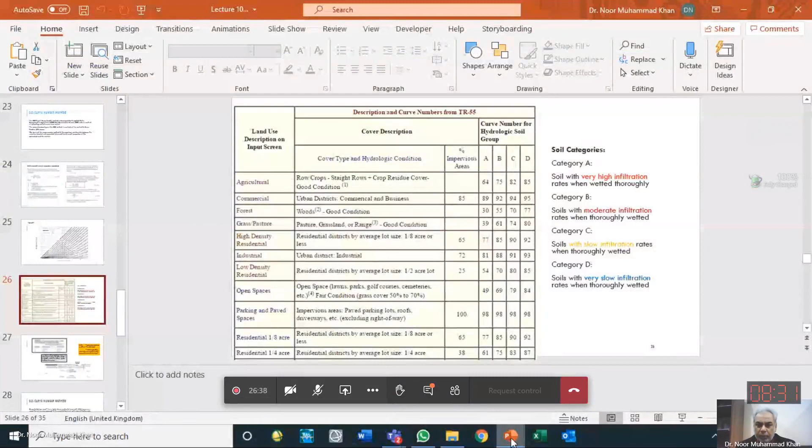SCS, Soil Conservation Service Department, a sub part of the US Department of Agriculture, has given curve numbers as a coefficient or constant for different kinds of soil, land uses, and soil types. For example, for agriculture land use having row crops, the curve number varies from 64 to 85 for different soil groups A, B, C, D. So four kinds of soil groups are specified, and they divided the soil based upon their infiltration capacity.

Category A has very high infiltration rate, B has moderate infiltration rate, C has slow infiltration rate, and D has very slow infiltration. So they divided into four characteristics. If the soil has very high infiltration rate, the curve number proposed is 64.

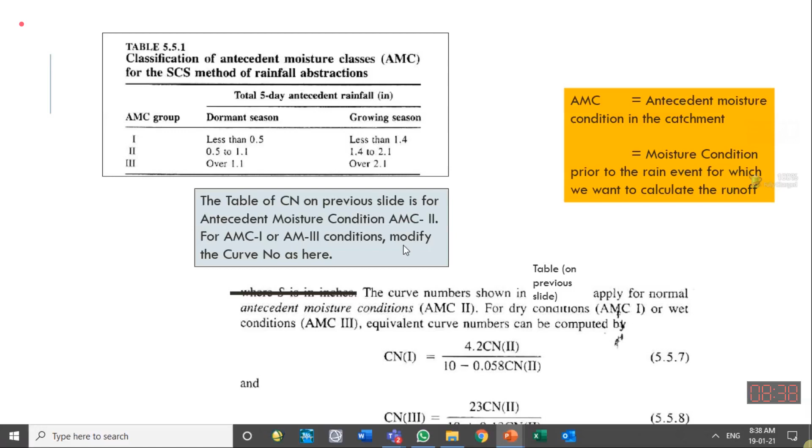So that should be taken into account. If curve number is known to us, this SCS method has given us the relationship between runoff, precipitation, and infiltration rate.

IA is initial abstraction, initial losses. Abstraction means taking out something. We use this word quite often in hydrology. We call groundwater abstraction is so much in Pakistan, meaning groundwater extraction is so much. Abstraction and extraction are similar things. So here, abstraction means water that is taken out of the precipitation, and the rest is the runoff. So it means initial losses which are there.

So S is the potential maximum retention in the catchment. The total retention which is possible in the catchment to fill all the depressions and take out the infiltration also, that is called S. P is the precipitation for which we want to find the runoff.

So they have related runoff, in units of depth of water (inches), equal to P minus IA, initial abstraction, squared, divided by P minus IA plus S. This initial abstraction, from different experiments, can be taken as 20% of the total or maximum retention. So IA can be replaced as 0.2S, and the same equation 2-1 can be rewritten only in terms of P and S: Q is equal to P minus 0.2S, squared, divided by P plus 0.8S.

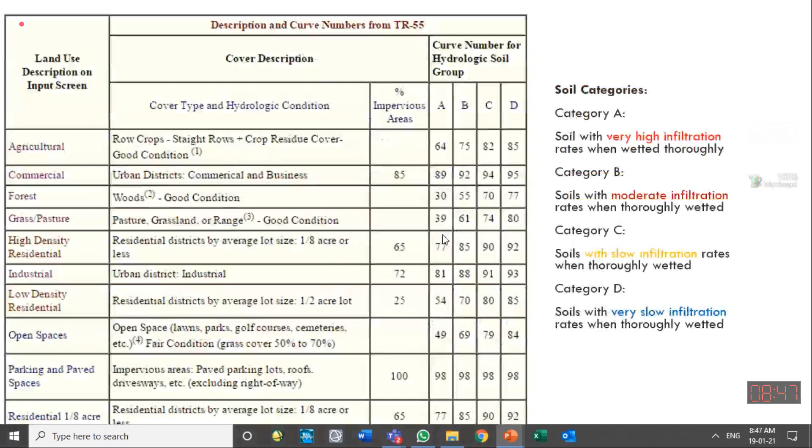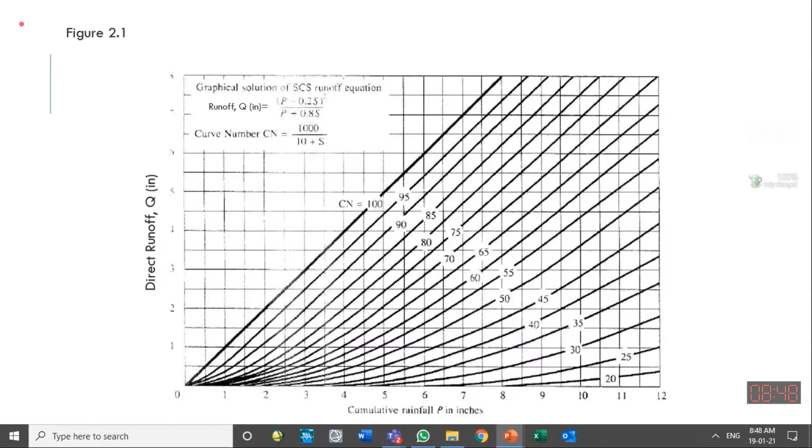So you can see that out of the 7 inches, 5.7 or 5.8 inches reaches the outlet, but the rest is retention in the catchment. If somebody wants to know the losses, they can find it from this method. If somebody wants to know the runoff, they can estimate it from this method. Hopefully you will be able to use it well.

So either you use a graph or you use the equation. You should know both of them. Sometimes we give the graphs to you. Equations are simple: Q equals P minus 0.2S, squared, over P plus 0.8S.

We know the original equation relates initial abstraction and total retention with runoff. Initial abstraction was taken as 20% of the storage of maximum retention. And curve number and maximum retention are related by 1000 over curve number, minus 10.

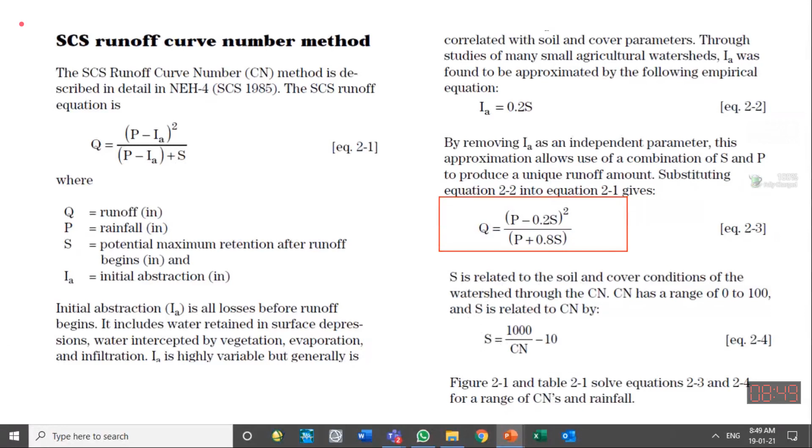So these equations are for inch units, keep that in mind. In other literature and books that use SI units in centimeters, you will find slightly different coefficients. So this method is available in different places using centimeters and in other places using inches. Take care that these equations are valid for inches.

Any questions on this method? This is widely used. People have used it in GIS as well.

They give the land type. They have the file for the land type, land cover, soil type. Using these three pieces of information, they find the curve number automatically from the computer because the table is also fed to the computer. So if the curve number is known, then the rest is calculation: calculate S, calculate runoff for different kinds of rainfall.

So methods are available which can use this SCS method. Hydrological Engineering Center, HEC-HMS software has computerized this SCS curve number method to convert rainfall into runoff.

Another method is unit hydrograph. We should know the definition of unit hydrograph and we should also know how to use it to measure the direct runoff. Unit hydrograph is a direct runoff hydrograph. A hydrograph is a relationship between some flow parameter with time. So if the flow parameter is only the direct runoff, then we say this is a direct runoff hydrograph.

So unit hydrograph is a kind of DRO hydrograph, direct runoff hydrograph. It is not a total hydrograph, not a total runoff hydrograph. So unit hydrograph is a DRO hydrograph, direct runoff hydrograph, which is resulted due to unit effective precipitation.

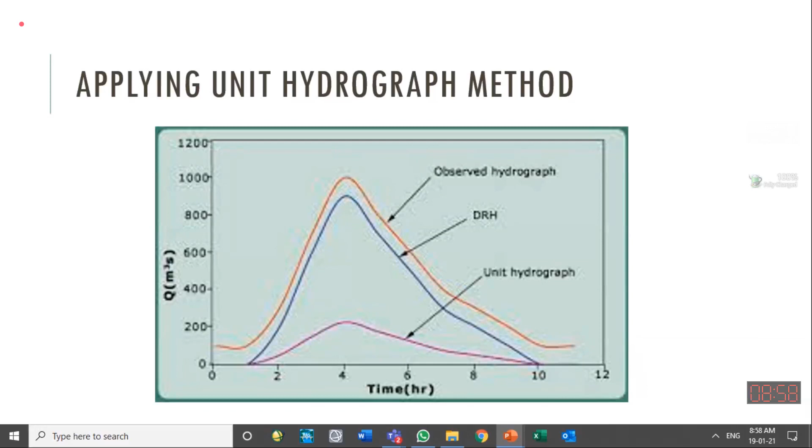If this unit hydrograph is for a storm of, let us say, 1 hour duration, keep in mind that the rainfall event can be of a different time period, and the runoff can be generated for a longer time period. Usually it happens that 1 inch of rain generates runoff for 6 hours. A 1 inch rain which occurred for 1 hour may generate runoff for 6 hours, 12 hours, or a different time. So we call this the base period, the time period in which the runoff is occurring. So base period of the hydrograph is a different thing, and storm duration is a different thing. This is the message: storm duration can be different from the base period of the runoff hydrograph.

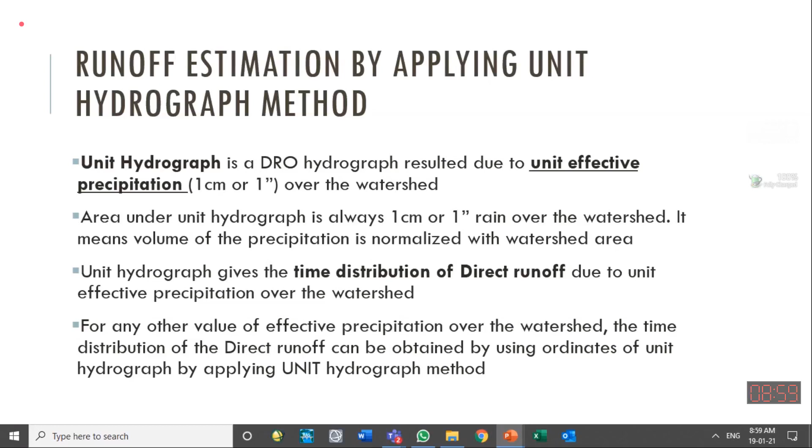So if we have the unit hydrograph available for a certain catchment, which is actually the representation of the behavior of that catchment, we can convert that into the direct runoff hydrograph. For effective precipitation of 1 inch, the direct runoff is the unit hydrograph. For any other value of effective precipitation, the time distribution of the direct runoff can be obtained by using ordinates of the unit hydrograph, multiplying them with the effective rainfall for which we want to find the direct runoff. Here is the definition of effective precipitation or excess precipitation: total precipitation minus the losses — evaporation, infiltration, transpiration.

Time of concentration — how to estimate the direct runoff for an effective precipitation of X inches. The discharge because of X inches of effective precipitation equals X inches effective precipitation multiplied by the ordinate of the unit hydrograph. That's the simple thing. I will talk about time of concentration in the next lecture — simply it is the time required by a drop of water to reach the outlet from the farthest location of the watershed. For example, we have a watershed and we have an outlet, so the time taken by a drop of rainfall or water at the farthest point in that catchment to reach the outlet is called the time of concentration.

When the storm duration is equal to the time of concentration, then we get the maximum flood possible in that area. So storm duration is selected by the hydrologist for carrying out the hydrological studies. He should select the storm duration based upon the time of concentration of that catchment. So carefully consider these things.

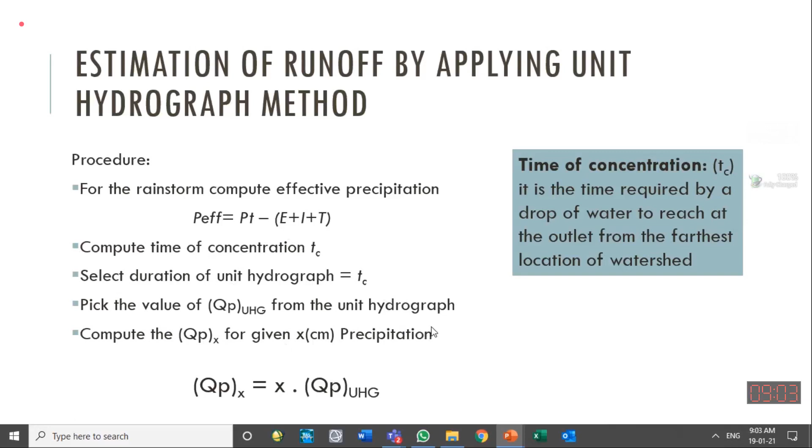So that is one method. In this we assume that the rainfall is uniform over the whole catchment. So this method is applicable for the rainfall event which is covering the whole catchment. We are not using it otherwise. The intensity of the rainfall is assumed to be uniformly distributed over the whole catchment. If it is not, divide the catchment into smaller parts, then derive the unit hydrograph for that part, and use that one.

It is good for catchments less than 500 kilometers square. So caution should be used, because for larger catchments the unit hydrograph has a different shape. We usually don't cover the whole large catchment with one rainfall event. For a larger catchment like the Indus Basin catchment, with the outlet at the ocean, it is not normally possible that the whole Indus Basin is covered with the rainfall event.

So this is good for smaller catchments, and it is applicable for tropical watersheds, those areas which are located in the tropical regions. So that is unit hydrograph.

So we have studied empirical methods: Inglis, Khosla, and Lacey method. We have studied a little bit more conceptual or physical-based methods, where some parameters are dependent upon the type or physical characteristics of the catchment. So we are moving towards more physical methods, that is the SCS curve number method.

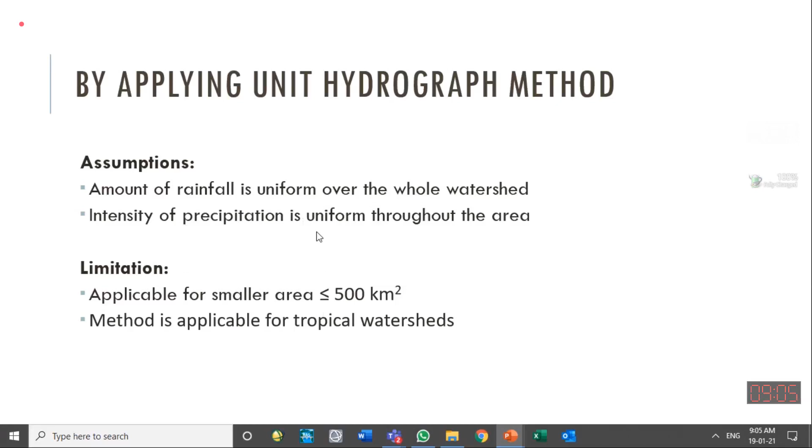Another method is the rational method, which also takes into account the characteristics of the catchment in the form of the runoff coefficient C. There is a simple equation which helps us find the peak discharge and the total runoff, both using this formula, depending upon the coefficient and rainfall we have selected. If we select the maximum possible rain in that place, this formula will give the peak discharge. If we select the average rainfall, we will get the normal or average discharge in that region. So CIA: three parameters. C is the coefficient which takes care of the catchment characteristics, I is the rainfall for which we want to find the runoff.

A is the area of the watershed. So C and I we use to calculate the peak discharge or the direct runoff from a catchment. These values vary, and the coefficients I and A have particular units. In some books they say I should be in inches, area should be in hectares or acres, so we have to take care of the literature we are using to select the C value. The literature will tell what should be the unit of I and what should be the unit of A. This is an empirical equation, and they have found that a certain kind of catchment should have a C value of so much, then runoff can be calculated.

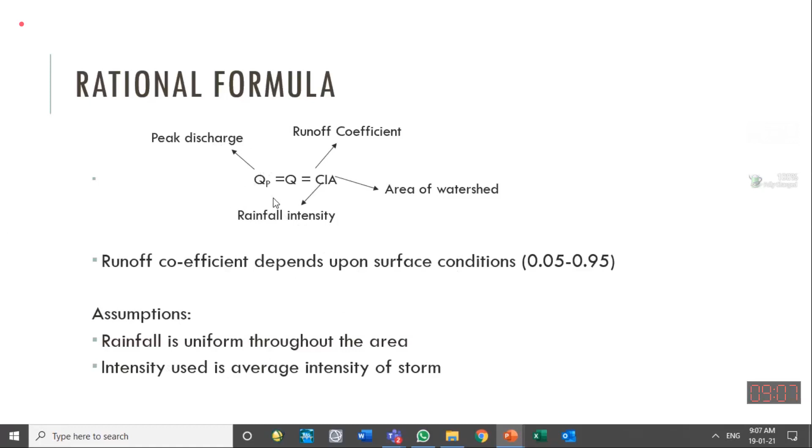Rainfall is assumed uniform throughout the area. The intensity used is the average intensity of the storm, so we get the average flow in that area. If intensity is used as the maximum precipitation, we will get the flood value, the peak flood value. So these are some of the methods of runoff estimation.

We're seeing what a hydrograph is, how we can separate the hydrograph, and how we can make the unit hydrograph. These things have been covered in the lab also, so we will go through them quickly.

Last time I taught you that groundwater does change. Here is the actual observed groundwater variation in UET. In December of 2019, the water level was 244.5 meters underground, with respect to mean sea level. It reduced to as low as 243 meters, and then in the middle of 2020, in July, it increased to 245 meters. So that is the variation of groundwater we are observing in this place, because of water abstraction and because of recharge from rainfall.

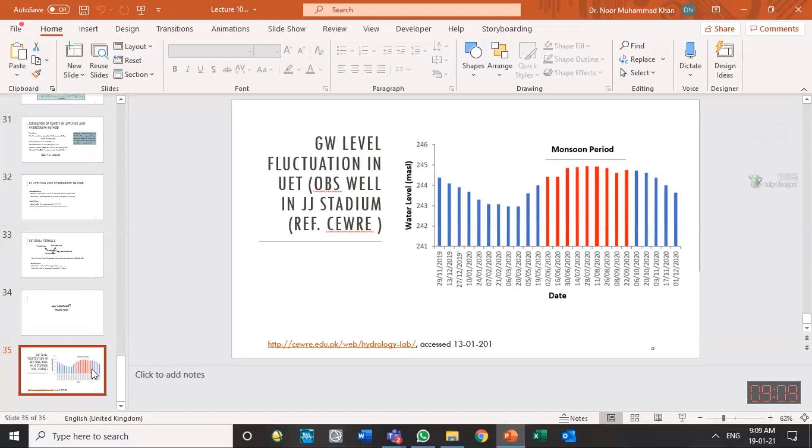So I stop it over here. If you have any question, you are welcome.

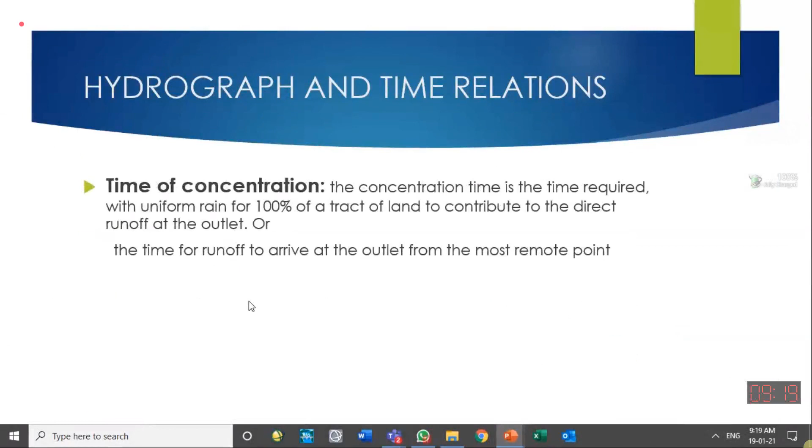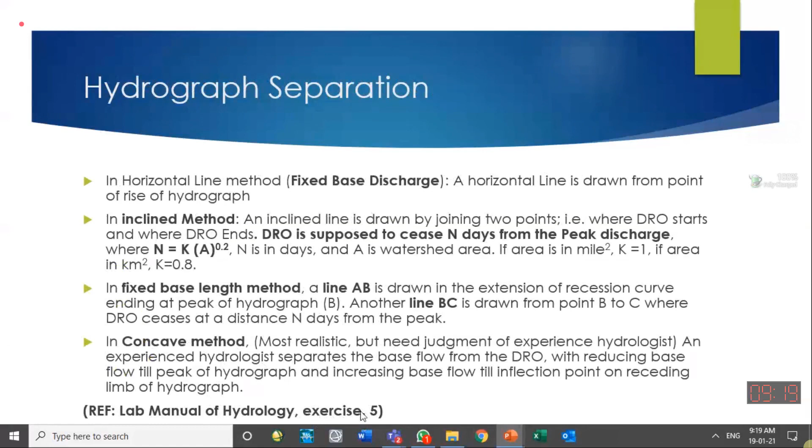We will talk about these factors, and then the next part covers the definitions, which are also given in the lab manual. Then separation of the hydrograph using the straight line method, the base length method, and the concave method, which you have covered in exercise 5 also, as you have gone through it in the lab.

Then how to make a unit hydrograph. So the definition of the unit hydrograph is placed over here again with reference to USGS. So definition, and how to make and how to use it - both things we should know.

We should be able, as a hydrologist, to make a unit hydrograph. For making a unit hydrograph, what do you need? You need the actual hydrograph of that catchment. It means you should have a stream gauging station for that catchment, which will give you the flow quantity at different time intervals after the rainfall.

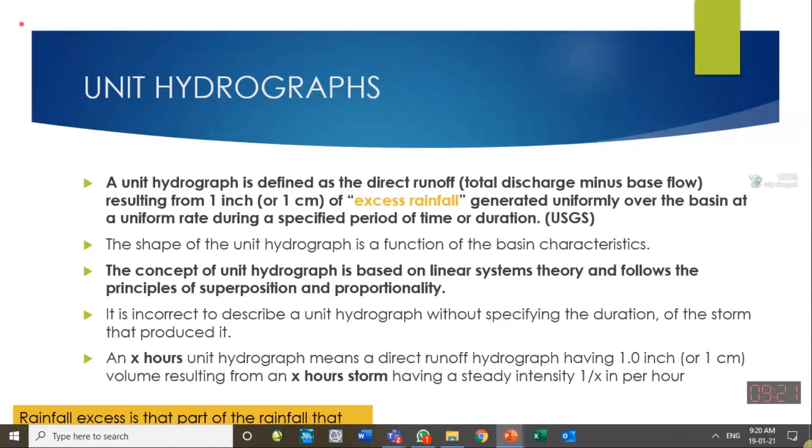Using those observed flows, we can make a total hydrograph. From the total hydrograph, we can subtract the base flow, and the remaining will be the direct runoff. Out of that direct runoff, if that is for an effective rain of more than 1 inch, we will adjust the ordinate of the direct runoff so that the area under the graph equals 1 inch of effective rainfall. So adjustment is the third step.

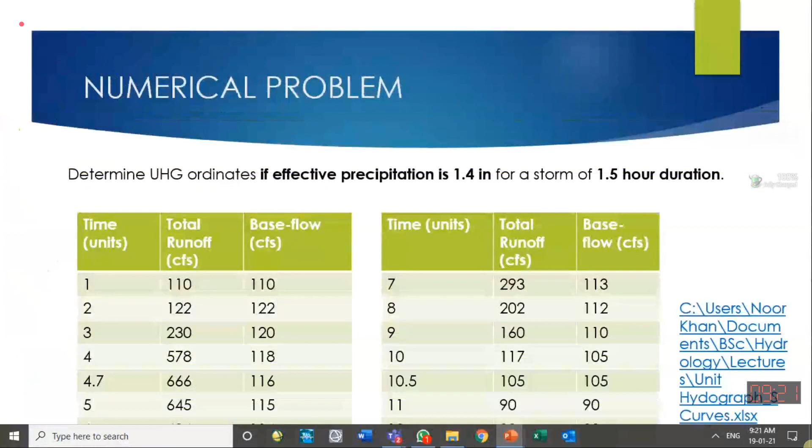So that's how to make a unit hydrograph, and how to convert a unit hydrograph into a unit hydrograph of a different duration - we call that conversion of unit hydrographs.

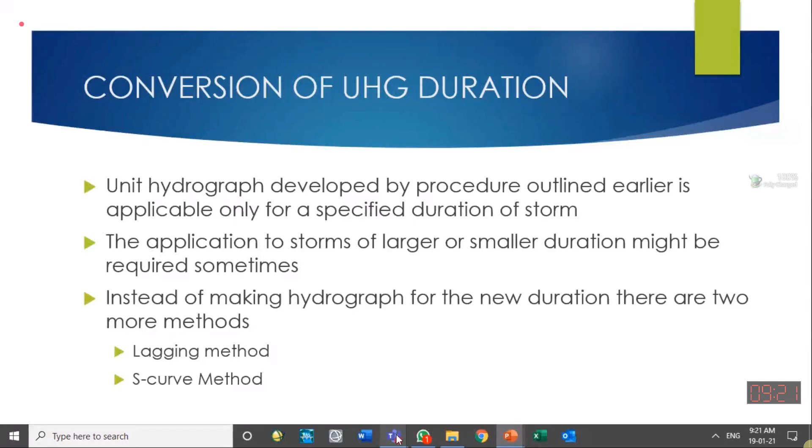So that's today's lecture we are assumed to carry out today. So let us move towards what is a hydrograph. I think you should tell me what is a hydrograph.

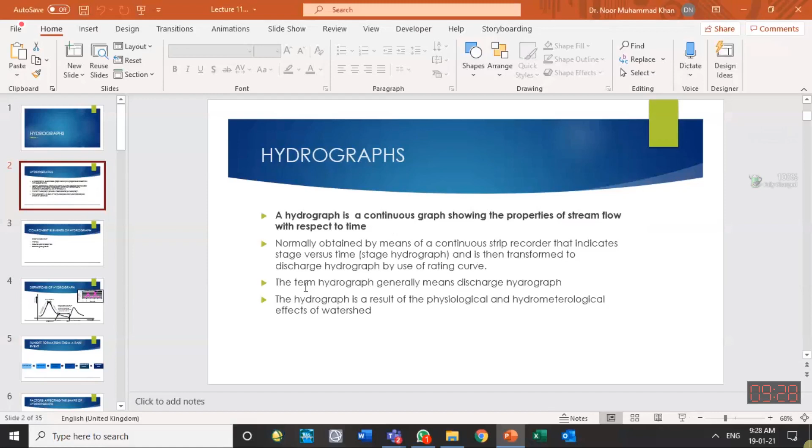And if we have a stage hydrograph and if we have a rating curve - who will tell me what a rating curve is? What is a rating curve?

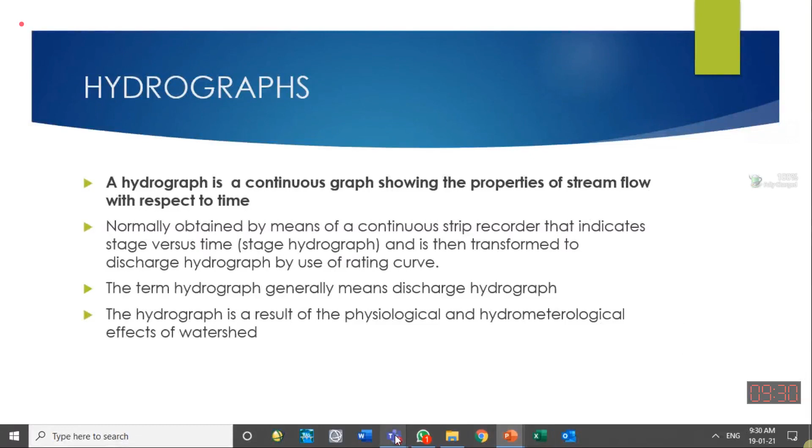Soil type, slope, what else? Cover on the land, roughness, infiltration - all these affect it. These are the physical parameters which affect the flow.

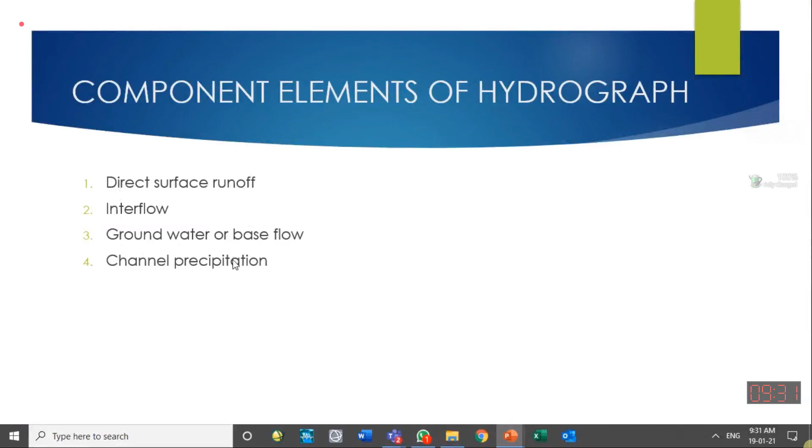So the runoff, the hydrograph, contains within it direct surface runoff - we have talked about it - interflow, groundwater, and the precipitation on the channel. So all these make the total hydrograph.

But for ephemeral and intermittent streams, it can go as low as zero flow. And for streams near the coastal area, it can go to the negative side also. Understand? Normally in a stream in Punjab, in Khyber Pakhtunkhwa, you cannot expect a negative flow - meaning flow going upward, upstream side. Is it possible? It is possible near the coastal area, depending upon the sea level waves - sometimes we have a backflow also.

So that is possible, but not in a normal watershed, only in the coastal area. Those cities which are located - for Karachi people, if they are studying some creek, Korangi Creek or Lyari Creek - they can expect water in both phases. So their hydrograph may go above or below the zero discharge. Positive will show discharge in the downstream direction, negative will show discharge in the upward direction.

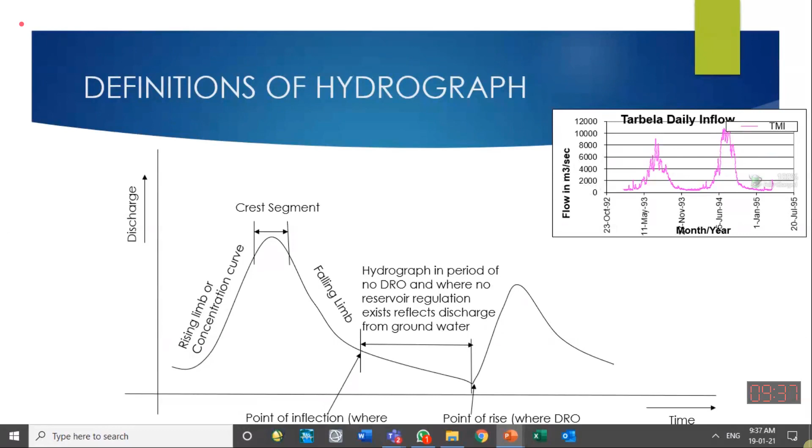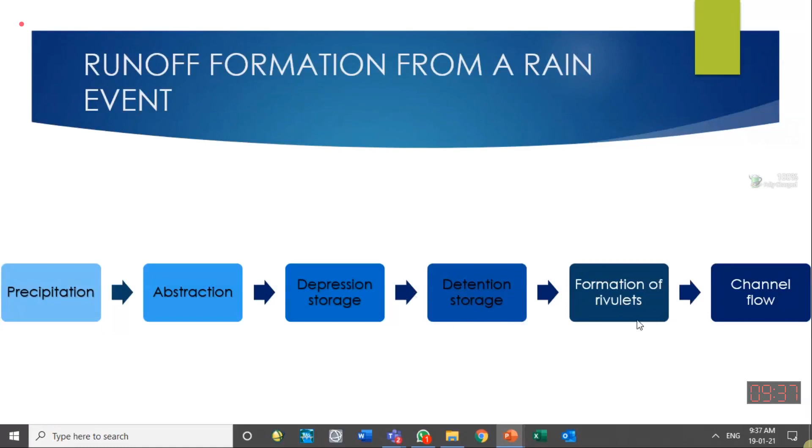If I want to convert that inches into cubic meter per second, I can do it as I told you earlier. So this is the process which generates channel flow: precipitation, then some abstraction or losses, and those abstractions are depression storage, detention storage, and then excess water starts flowing over the land, and then water reaches the channel flow. We have covered that in the previous lecture also.

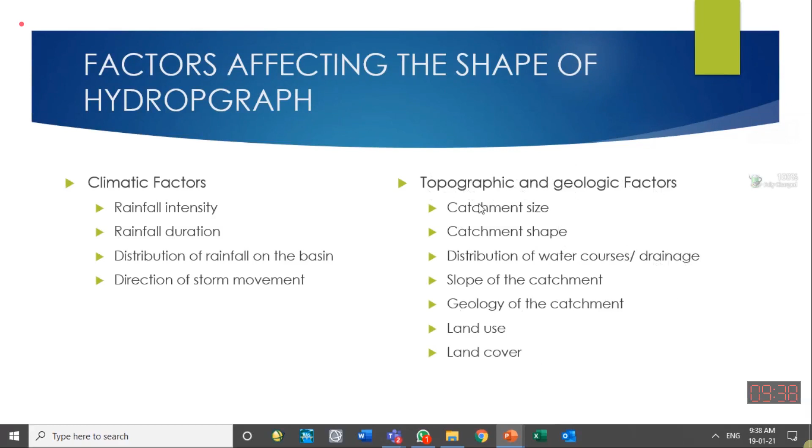Factors which affect the hydrograph shape can be categorized into two types. One is the climatic factors related to rainfall type and the rainfall event. The other is the physiographic or physical characteristics of the catchment, which we call topography and geological factors. You can call them the physical factors of the catchment. So one by one, we can discuss them in these slides.

If we first focus on the climate and precipitation factor, the type of storm does affect the hydrograph—whether the storm persists for a longer time or it is a short duration storm with huge rainfall in it. Thunderstorms are usually called short duration intense storms, containing intense rainfall activity but for a shorter duration. So for a smaller basin or smaller watershed, the highest flow will be generated because of a thunderstorm. Thunderstorms usually produce peak flow in smaller basins.

For a larger basin, since a thunderstorm is a small duration activity, for a larger basin like the Indus Basin, Mangla Basin, or Tarbela Basin, we usually need a longer duration rainfall, which occurs with cyclonic storms. We have told you about a cold front and a warm front while studying the rainfall or precipitation chapter—these are the air parcels. If it is because of cyclonic phenomena, then we usually have persistent and longer rainfall activities, and they produce flood activities. Peak discharges are produced in larger basins because of these kinds of rainfall activities.

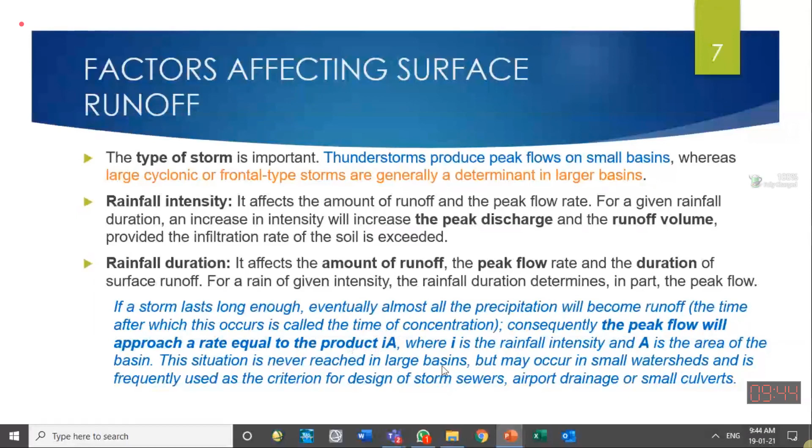So that is a theoretical possibility for a larger basin, but for a smaller basin it can be achieved. That is what is mentioned here. So that is how the effect of rainfall duration is there on the hydrograph.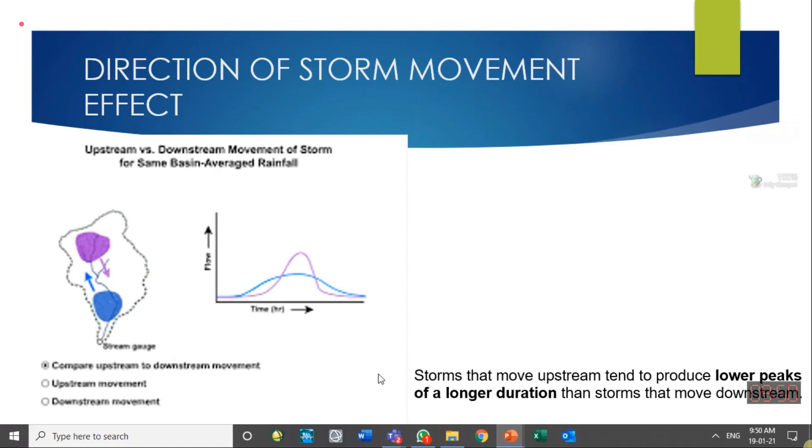Next is the effect of the drainage area, the shape of the area, and how well developed the streams and channels are. If it is a smaller area, the overall volume generated for the same rainfall will be less. But for a smaller area, it is possible that more intense rainfall occurs on it.

This is because the peak flow per unit area reduces with catchment size for a given rainfall depth. Drainage area also has an effect on the time base of the hydrograph, which is lengthened. The higher the drainage area, the bigger the basin, the more the time base of the hydrograph will increase.

Why does the peak flow per unit area reduce with catchment size? Carefully note these words: peak flow per unit area, not simply peak flow - he is dividing the peak flow by the area. So peak flow per unit area increases if the catchment is small and reduces if the catchment size is large. That is the message: as catchment area increases, peak flow per unit area reduces.

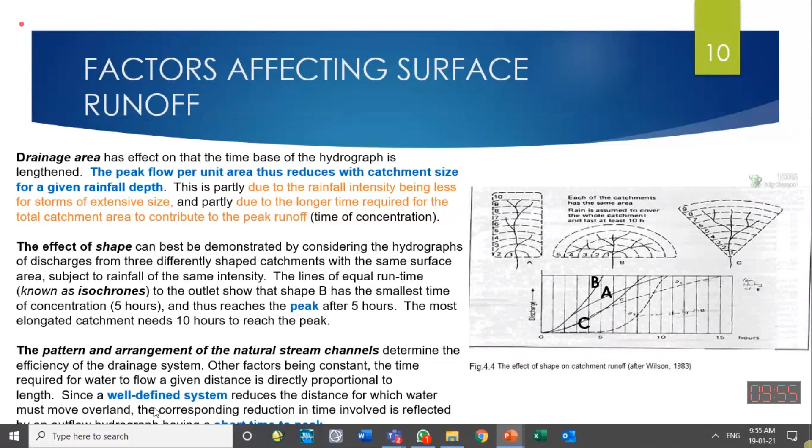Steeper slope reduces the time of concentration, so a quicker peak is generated. Also, steeper slope doesn't let infiltration occur because water cannot stand there, so infiltration will be less, more volume will be generated, and we get a larger volume under the hydrograph. Similarly, the geology or pedology of the catchment controls the infiltration rate, whether it is sandy, rocky, or silty, which controls infiltration rate, volume of water, and runoff.

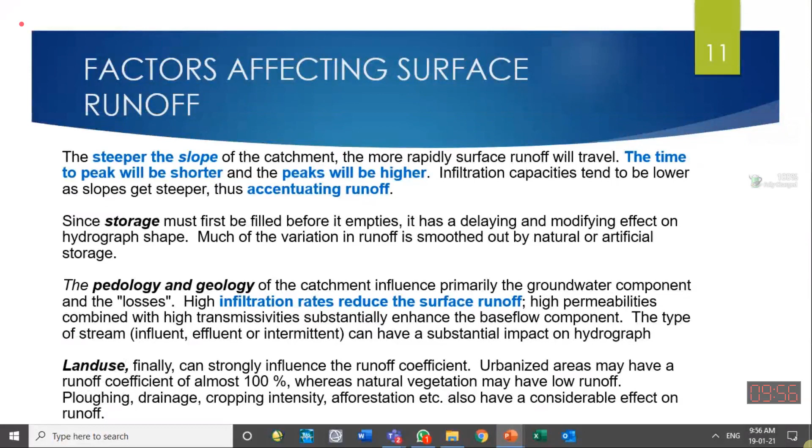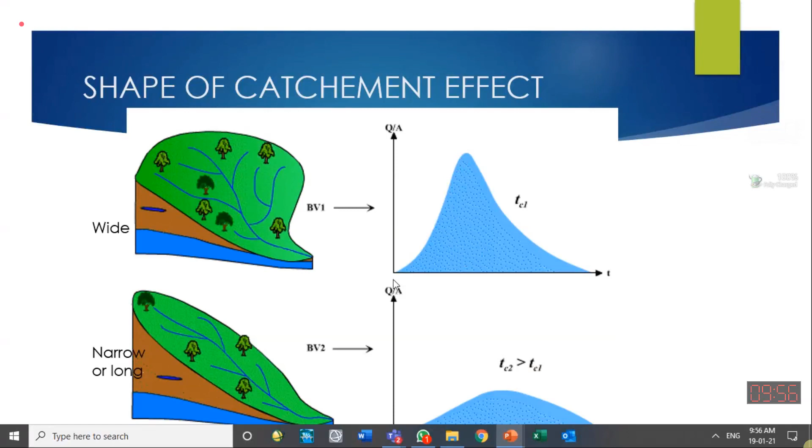So land use also changes this: whether it is agriculture or urban area controls the runoff also. Here the shape effect is shown. A narrow catchment will get the peak later, and the peak will be smaller compared to a wider catchment, which has small time of concentration, higher peaks, and earlier peaks. Shape of the catchment is shown over here.

If the shape is wider close to the outlet, we will have higher peaks. If the shape is narrow, this is the normal catchment, and we will get peaks later as compared to this one.

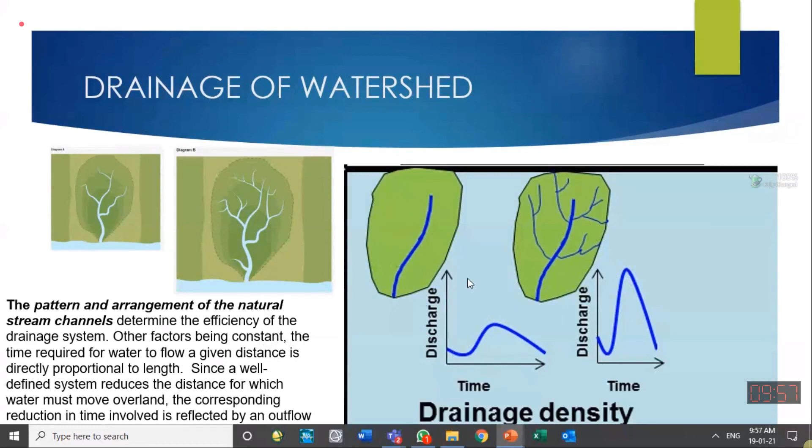So land cover effect: if it is a forest, it will stop the water and generate less flow, runoff will be less. If it was barren, without any forestry, open, there would be less infiltration and less depression storage, so more flow will be generated. This is one cause of flooding in urban catchments where vegetation is being removed, leading to more floods.

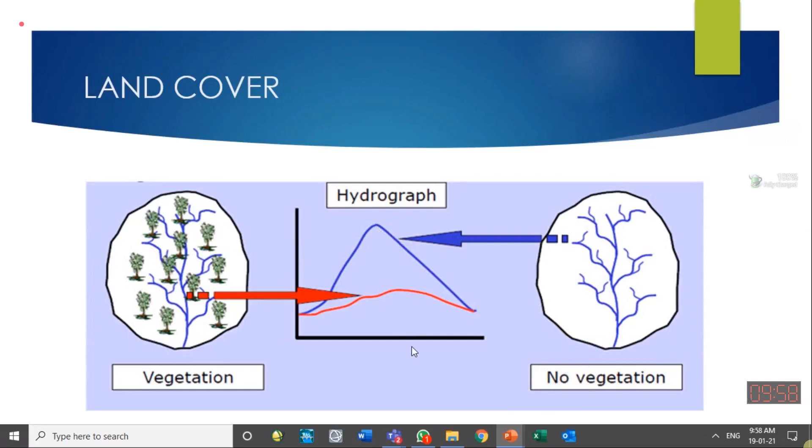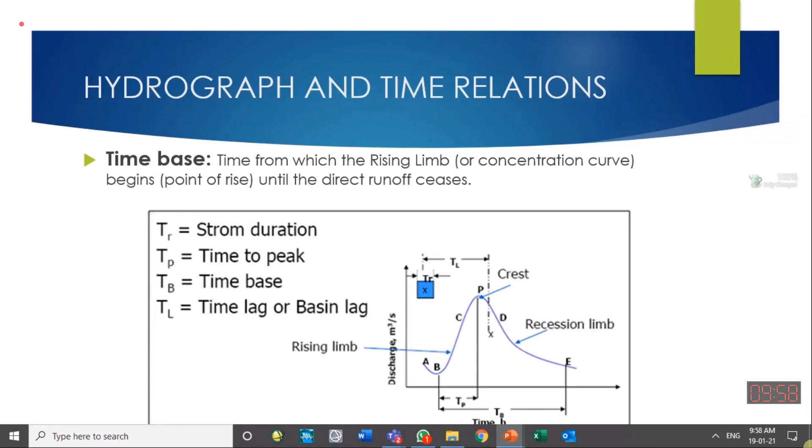So I stop it over here. We will continue from here with the different parts of the hydrograph and how to divide them, how to separate the hydrograph, and how to make a unit hydrograph. Any questions?